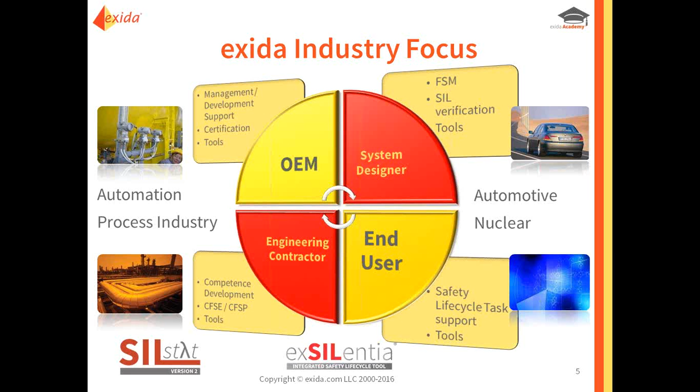exida is involved with the complete supply chain of functional safety in multiple industry sectors, anywhere from the original equipment manufacturers who require product certification through to the end users that use the products. exida provides software tools, training, consulting, and procedures related to functional safety, security, and reliability, as you can see in front of you.

Here are some of the engineering tools. The best part I like about our tools is that it removes that error factor - it removes the need to worry about manual calculations, unless you're old school, but we do have software that will help do the calculations for us. Anything that we know how to do, we like to try and make public so that we don't have to keep any secrets. It's all out there, all available to you as well. We just do it every single day.

We have alarm management tools. We have PHAx, SIL selection tools, SRS, SIL verification, as you can see in front of you. Basically our main tool there is exSILentia. We also have SIL Stat - a lot of tools that end users love to use.

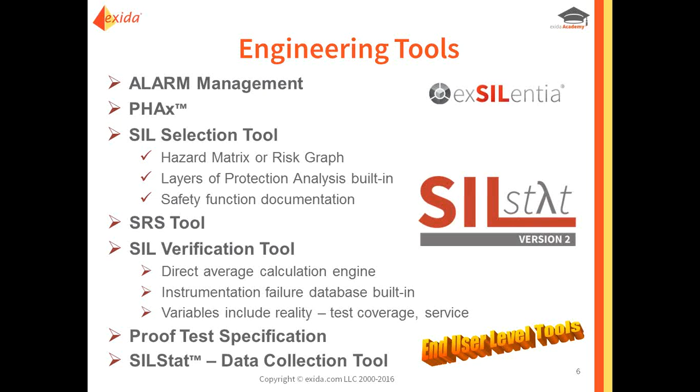We do have a suite of services and products. You'll see here the consulting that we can do is with the end users. It's in IEC 61511. We have, as you see here, 62061, ISO 26262, alarm management, and cybersecurity.

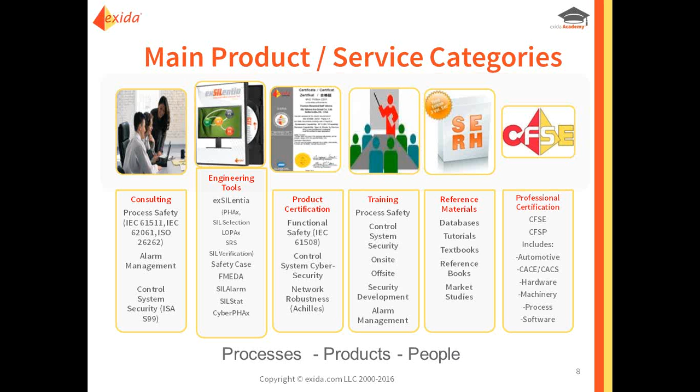Reference materials, we touched on that. And then, of course, we have the professional certifications for people as far as CFSE, CFSP, and then also now in cybersecurity, which is CACE and CACS. We do have some exciting news that's going to happen within the CFSE program as a whole. However, we'll have to wait, I believe, another month or two before we can release it. But we may have some new specialties for people in some other areas of functional safety.

All right, today we're going to be speaking about a few different topics. As you can see, closer to the end is when I talk about the proposal and your expectations, but I kind of want to share with you the process and how we get from A to B, from, hey, I'd like product certification, to, okay, here's my proposal. Now, how did you come up with this number? And kind of teach you a little bit about IEC 61508 and the amount of time that I have.

Okay, so first, let's start off with the introduction to 61508. Just a real quick top level.

Now, the functional safety goal, when you want to get product certification, there's a goal in mind with functional safety, and that goal is that the automatic safety function will perform the intended function correctly, or the system will fail in a predictable manner. And when I say predictable manner, it has to be a safe manner, right? You don't want to fail in a predictable, dangerous manner, because then people are going to get hurt.

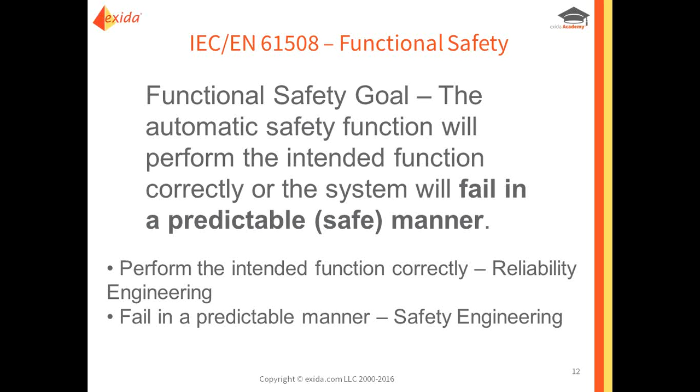So when something fails, and everything does fail, how is it going to fail? In a safe way, an unsafe way? Are you going to be able to figure out that something did fail, or is it going to be an undetected failure? Now, the two keywords here for reliability engineering is you want to perform the intended function correctly, and then when it fails in a predictable manner, that's when you get to safety engineering.

So IEC 61508, it's a standard, it's an umbrella standard. IEC 61508 is a huge document that we all have to go through. Well, everyone here at Exida, we have to learn to love this standard. But however, the standard does get broken up into other standards to help meet different sectors. For example, the nuclear sector has their own standard, as you see, the international standard. Machinery safety has one, and of course, our end users have their own as well.

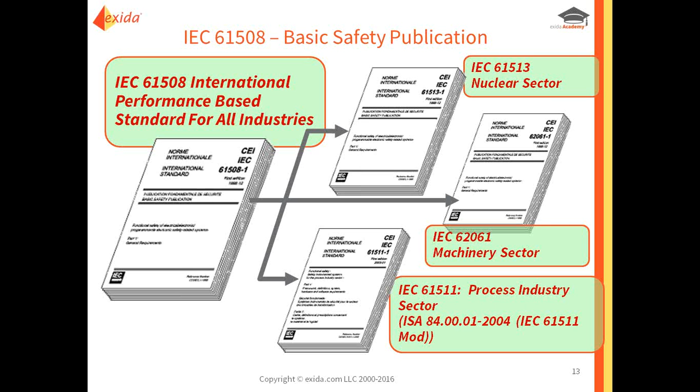So, what is certification? I see that there are some new people on here, and a lot of people will email us. I'd say 5-10 customers a week will come to us saying, hey, I heard about this SIL thing. What is it? What do I expect? How much time does it take? And these are very good questions. I see a few questions already trickling in, which I'll probably get to at the end, but I'll try and squeeze them in as I go.

But really, what can you certify? Well, you can certify systems. You can certify products, components. You can even certify people. The certification is a third-party assessment. It's done against a set of requirements based primarily on international standards like IEC 61508.

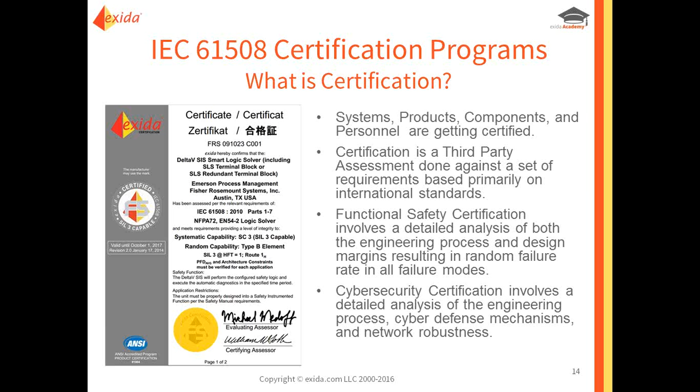Now, functional safety certification involves two different things. It involves both your engineering process and then also the design margins that result in those random failure rates in all failure modes, not just one, but in all failure modes. And then, as a growing need and concern has developed, we've also been accredited to now do cybersecurity certification because we're finding that systems are being impacted, and there's a huge need and a huge risk that's starting to develop within cybersecurity.

So, who does certification? Now I know what gets certified, but who actually does the certification? Well, certification programs have been established by private companies, also by governmental bodies all over the world, and all organizations who perform certifications, because you can choose from a handful of certifying bodies.

But make sure that these are accredited. For us here at Exida in the United States, the body to go through is ANSI, the American National Standards Institute. Throughout the world there are other institutes you can get your accreditation from. For example, one is DAkkS. Every country has their own agency to go through, okay?

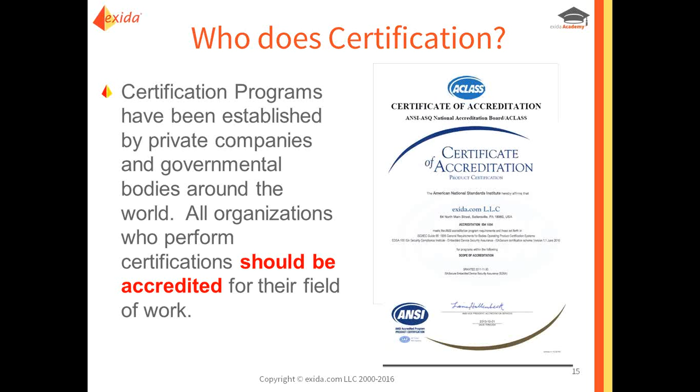So when you think about it, when you're asking someone to get a product certified, wouldn't you like to know that the person certifying you also has to be audited, to make sure that what they're telling you is actually the truth and that it actually does meet the requirements? That's why we stress the importance of accreditation, because we want you to know that we're accredited. We're going through the same rigor you are, just at a different level.

So how does ANSI fit in with this global feel? Exida is fully accredited by ANSI, okay? That's the United States liaison. So we're certified as a certifying body for cybersecurity and functional safety.

Now here's the next thing. If you're going to accredit us, ANSI, who's accrediting you? Who's giving you the audits? And that's where the IAF comes in. A lot of acronyms, but I'll explain them all. The International Accreditation Forum, okay?

So ANSI has to report to the International Accreditation Forum, and most countries around the world are signatories of the IAF for the multilateral recognition arrangement. This didn't happen overnight. However, what it allowed us to do is, because we're accredited by ANSI, the manufacturer now has a certificate that has global acceptance. So when you say this is certified per ANSI requirements, that now gets related, so any country in the world has global acceptance due to the stages that the program has gone through.

Now, when you have an accreditation and you're going to get your product certified, make sure whoever you choose, you see that logo on that certificate. If it's not on that certificate, more than likely they're not accredited.

So I always say to each their own, because there are other certifying bodies out there that say, hey, I don't need to be accredited. Why do I need it? My business is already doing fine. In fact, we do have a very large competitor of ours who's been around for a long, long time, probably the longest, and they're not accredited.

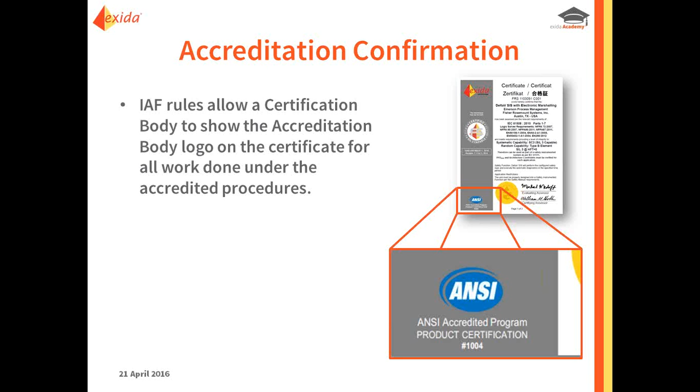All right, so you learned a little bit about 61508. Let's move into the initial certification request. So what happens? Well, if you're a new customer and you're saying, hey, I heard about this SIL thing, or hey, I have this product, I'm trying to win a bid, how do I achieve certification? Well, the first thing you do, obviously, is you send an inquiry in. It filters through the people till it gets to the right person who can help you with the service. So it comes into Exida, we'll say, and the first thing that's going to happen is you're going to fill out an application.

Why do we do this? Well, you're going to learn throughout the presentation why we ask these questions, because there are a few things we're trying to get to that can impact that proposal and impact how much time this job's going to take, so we can give you a timeline.

So this stuff all gets filled out, and then as soon as that's done, a quotation number gets generated within exida, and then we create the proposal. We're pretty quick at what we do because we do it every day, a few times a day with these proposals.

But the customer doesn't see the work behind the scenes, and they don't understand how did you get to that number. Well, we also have an initial welcome call, we'll go over the proposal and answer all your questions. But they're saying, well, what just took place? How did you say my job is worth X, when I asked for a different job and it was Y? How are these things different?

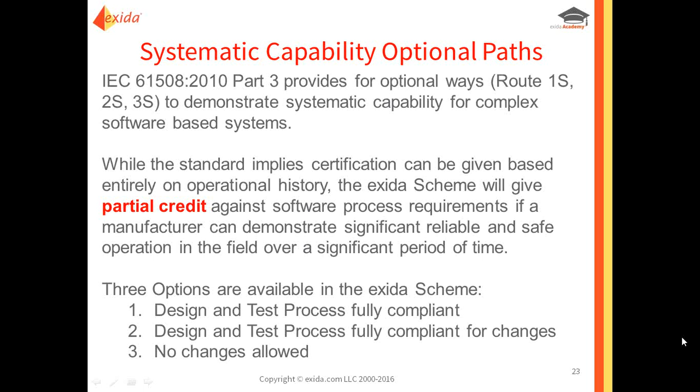So what did the exida scheme do? Well, we developed a scheme where we've developed 3 different ways to get certified. One, you can have a design and test process fully compliant. You can have another that's fully compliant for changes, and of course the third one is there's no changes allowed. Each path has different requirements going through. Also, for a proposal's sake, since we're talking about certificate expectations, the proposal amounts change depending on what path you go because of the amount of work involved.

Okay, so let's go with option 1. The first option is a new product. There's no field history. It's brand new out the box. You guys just developed it. It might actually still be in the development phase.

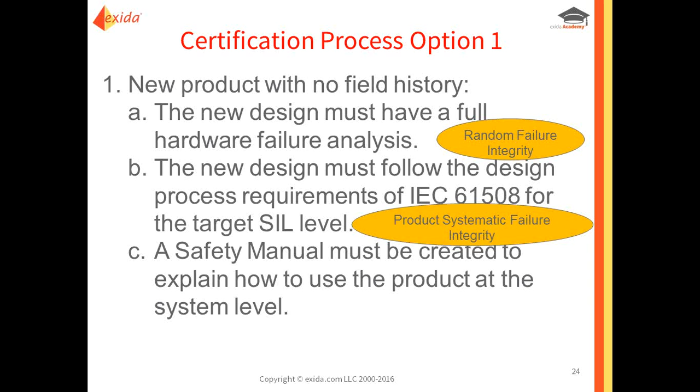So what do you have to go through? You have 3 different things. The new design must have a full hardware analysis, failure analysis - that's also called your random failure integrity. The new design must follow the design process requirements of IEC 61508 for the target SIL level - that's your product systematic failure integrity. And of course, a safety manual must be created to explain how to use the product at the system level. That's also another systematic failure integrity.

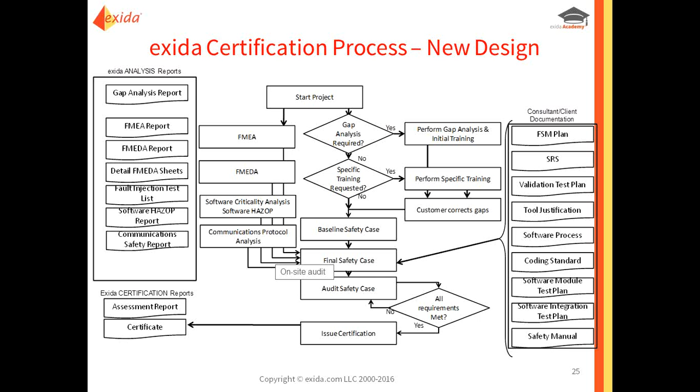So when you're looking at the new design certification process, this is still option 1. That diagram we went through in more detail - we have to go through the entire thing. There's no shortcuts, no requirements already met. Why? Because it's a new product and there's nothing we can use previously to help us achieve certification. So a new product is going to be a little more work, but that's okay, because sometimes time to market is the most important thing, whereas you don't want to wait 5 to 10 years to get field history or shipping records so you can get certification quicker, right? So sometimes you don't need to do that.

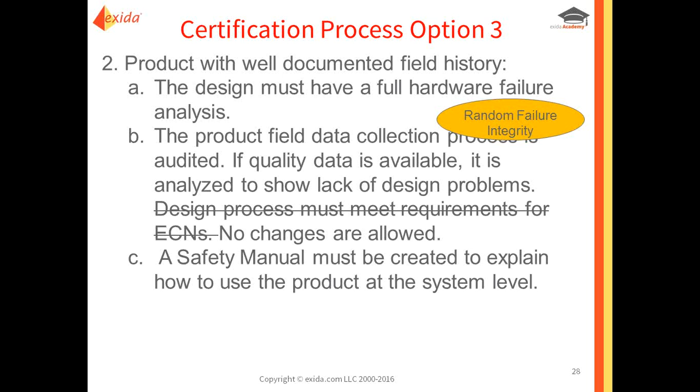Let's say it's a product you don't sell very much of, but you need it for a huge order. You can go through certification a lot quicker if you're expecting no changes. This is usually a strategic move. If people need certification quick and less expensive, they'll go this route, but they can't make changes, and there's a lot less work that we have to do to certify.

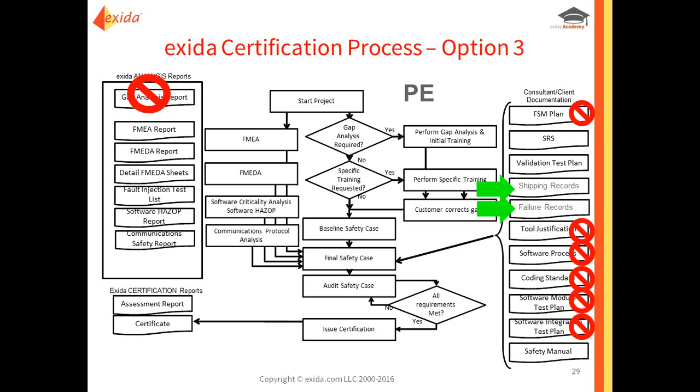And as you see here, look at all the red marks now of all the documents that we don't really need. Obviously, we still need the shipping records - that's key - and we need the failure record, which is also key. However, you can cancel out so many other areas.

Now we're quickly moving here into the certification process. So now that you've seen the different options, I want to share with you what other certifying bodies, or conventional certification processes, normally show. We get this question a lot, so I decided to spend a little time to put it together. But there are differences with every certifying body, so you've got to make sure you know what you're asking for.

Look here. There's your certifying body with a conventional process, and here's the manufacturer. I think I'm speaking to a lot of manufacturers today. So bear in mind, when you get a quotation and it's price X, and then you get a price from us and it's Y, you're like, well, why is it so much different in price? Well, here's one of the reasons usually.

Usually it's an a la carte type certification, which we can provide as well. We just don't recommend it, only because of how much time it really takes that manufacturer to get certified. They just don't realize it, especially if they're a newer customer.

The certifying body from a conventional certification process, you'll see here - you start your project and they do a gap analysis in a sense, and they say, okay manufacturer, will you please supply an FMEA, the safety case, which basically has all the different hundreds of requirements. You need to show them how you meet those requirements to the standard.

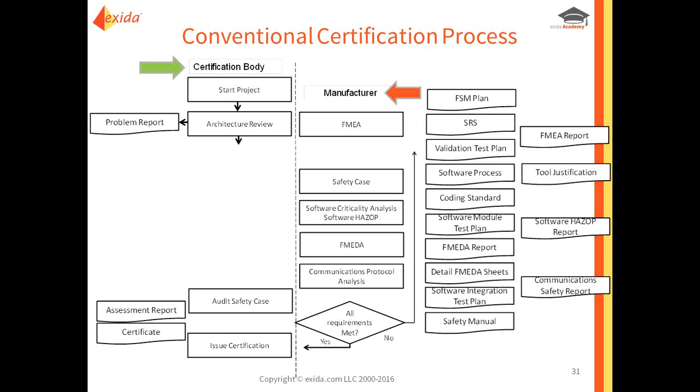So here's some quick quotes. I got two of them - I didn't want to bore you with too many. However, we feel these two we got this year were pretty right on point with the things we've talked about. This guy says: we estimated a functional safety project after getting a much better price from a conventional German CB. The work from our engineers was estimated to be between 1,000 and 2,000 man-hours. After discussing the process with exida, we estimated 200 maximum hours. The overall cost using exida was much less.

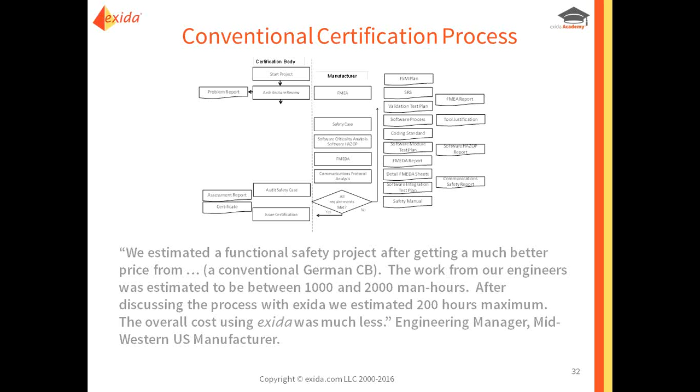And like I said, we get this a lot. Why? Well, when you look at the process and see how much work the manufacturer has to do compared to how much work we have the manufacturer do, it's almost night and day. And I'll show you what manufacturers have to do when we do certification as well.

Here's another one - I thought this was quite interesting. They said: we have been using exida, and our sister company was using, let's say, XYZ, a European conventional CB. I described our experience with exida and then asked the engineering manager in our sister company about their experience. He said it was much harder to get certification.

I interpreted that to mean that XYZ is tougher technically, but I had to ask why. He reported that XYZ did not respond to their emails. They put us back in the queue every single time one of their documents didn't pass. So when they had to go through that reiteration, they had to go through it again.

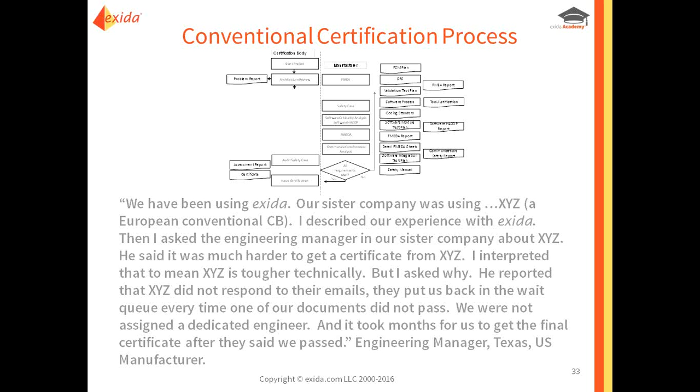However, they got put last, right? Because they didn't have that dedicated engineer to help them through the process. And it took months for them, even when they finished, to get the certificate once they had passed. We hear this story a lot. It was just nice to have somebody give us a quote so that we could put it down on paper.

So now I want to show you. Okay, so now you know the conventional certification. Here's what the exida process is, right? So if you see here, here's your manufacturer, here's exida. As you can see, we do everything for you. The only thing that we don't do is we can't make documents for you, right?

So we'll point you to what we need. We have the safety case. We'll give you the action items. You come back. You have a dedicated engineer for all of your work.

So with any job, there's usually 4 or 5 engineers dedicated to your job. You have a project manager who will be your main point of contact. You'll have an evaluating assessor, a certifying assessor, and also 1 or 2 others depending on if you have a Type A or Type B product. Type B products need 2 different people to do the FMEDAs, one electrical, one mechanical. So there's a lot of work that goes in there, and because we do it every day, we can get through it at a faster rate, okay?

And like I said, the only thing that we ask of manufacturers is just supply the documents. If there's testing that needs to be done, you most likely did the testing already. Some products that are Type B need fault injection testing, so we'll generate a list and say, will you test this? And you'll go through, you'll do it, and we'll keep moving on.

All right, so let's go and talk about the different stages here. Like I said, I'm going to break it into 3 phases so you can kind of understand the process a little bit more, and then we'll go and talk about the proposals and things of that nature. So the gap analysis, right?

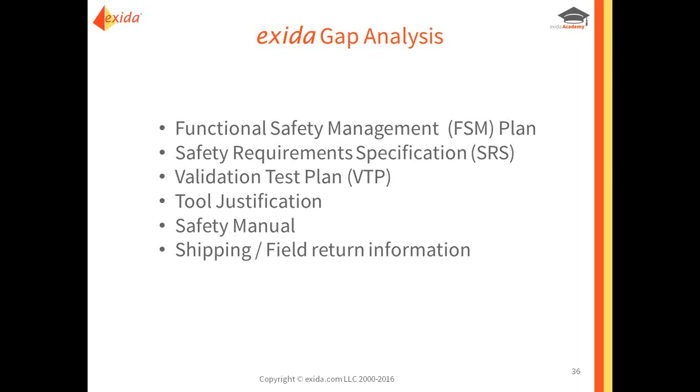We'll look at the validation test plans, some tool justifications, obviously the safety manual, and of course, if possible, the shipping and return information, depending on what path you go down. And from this, what we will do is create those action items, see where you stand per the standard, and then we can work off those action items as we go through the project.

What I like to do, and it can be done 2 different ways, is you can have an on-site audit at the beginning, or we can also have one at the end. I like doing it at the beginning personally. Why? Because I like seeing that the documents given are what's actually being done on the manufacturing floor.

If manufacturing is done on the floor, it's perfect. We're able to go there. We're able to just verify everything. We can interview certain people, just making sure that what they're saying is what they're doing. And it's not that we're trying to find fault. Let's just make sure that this company is as safe as they think they are, okay? And we don't shake fingers. We just really bring awareness to what's going on inside.

Once we do the manufacturing tour, if they require, we do it without any charges. We also do a training while we're there, and the training is excellent. You can bring as many people as you want in this room. They can all sit in, they can listen. We'll do a quick overview of IEC 61508.

Why we think this is important is because now you'll have an understanding as to why we're getting certification, why you are requesting this product certification. A lot of marketing people love this training because then they can understand it, they can go and sell it, and they can answer the questions.

We'll also, at this time, go through that gap analysis if there's anything outstanding. It's incredible how much work you can get done when you're person to person. I guess it's kind of old-fashioned of me, but I believe the internet's great, however it has its limitations. I know that if someone walks in that door, even if you're reading an email, that person who walked in has priority, whether it's just a story or a water cooler discussion. That's just human nature.

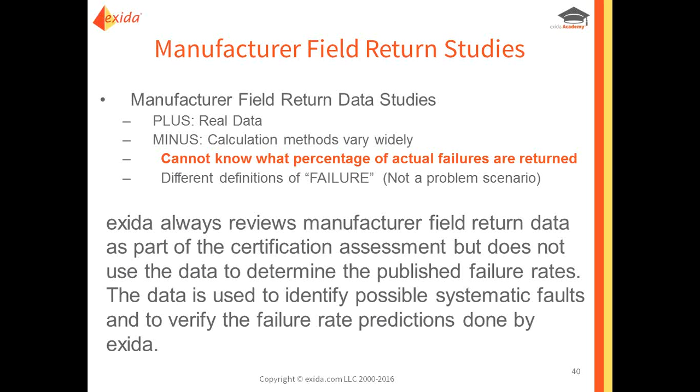We actually enjoy looking at companies' failures. Why? Because it's fun to see if we can see any common failures, or if there's any outliers. Some outliers you can throw out because maybe it wasn't the manufacturer's fault. Some reoccurring ones we want to look at and say, okay, look, you're seeing this failure a lot. What are you doing about it? Show us an impact analysis. How are you going about correcting it so this does not happen again? And it only makes that company safer.

Now we have predicting failure rates. You had actual failure rates with pros and cons, right? The biggest con is that you don't really know all the failures. Now, when you predict failure rates, exida, we developed what we've talked about, the FMEDA. It's a technique that predicts failure rates and failure modes on a product. This is one of the most used methods, and it's widely accepted.

Now, how did we get to this stage? We didn't do this overnight either. exida has the world's best set of field failure data, with over 250 billion unit operating hours from the process industries, with which it has created a calibrated component failure database to use in the FMEDA analysis.

So what do we do? We actually take that field failure data that we're seeing from end users, and then take the FMEDAs that we've created, the predicted failure rates, and match them. We say, okay, how well are we doing with this ball valve? How well are we doing with this actuator? And we can actually see what the actual failure rates are compared to what we predict. We are very, very close, and it's very exciting that this tool has become what it is today.

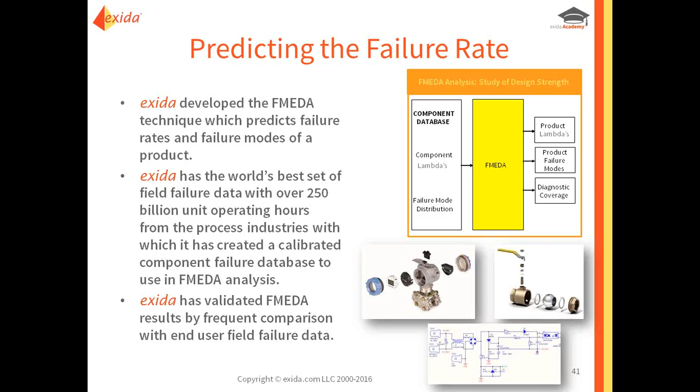So I've talked about this word FMEDA a lot. What exactly is an FMEDA? Well, a great way to explain it is that every failure mode of every component is examined.

And I want to pause there because that's exactly what we do. It's very cumbersome, it's very tedious. It takes a lot of time to do an FMEDA. But that's what we get, that's why people pay us, is because we don't mind doing it. We're those people that don't mind sitting here and crunching numbers for hours at a time.

So we'll take that product, right? And we don't need your product physically. We just need, let's say, a bill of material, a schematic, maybe the wiring diagram, and we'll look at this product, break it all the way down to its nut and bolt, and figure out how many ways this washer can fail, what could happen if this happens. So we'll have all these scenarios. Because we've done it for so long, we have them all listed, and we go through each list, each component, and then we come up with this.

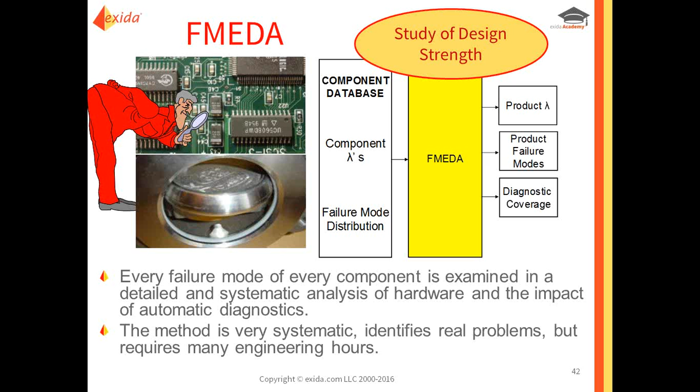Then at the very end, after you put it all together, that's how you get all your different failure rates, and you add them all up. You can see what's your fail-safe, fail dangerous, dangerous detected, dangerous undetected. This method is very systematic. It identifies all your real problems, but requires, like I said, many engineering hours.

Okay, so now you understand the FMEDA at a top-level approach. Now you have this failure rate data. There's differences from what exida does compared to other conventional certification bodies. exida, and I can't give us all the credit, but because of our advisory board that consists of all end users, they tell us what they want to see. They tell us what they need to see when they buy a SIL certified product.

They don't want to just see that PFD number, which has no false trip data in it, as you see in the bottom right-hand corner. You can see that quote there. It says, false trip rate is an essential design parameter for our SIS designs. How can I do this without the data? Right? Only exida certifications provide that. That's one of the bonuses, that we do things with the end user in mind.

You'll see in the left table there, either table you want to look at, we identify different services: safe, the Lambda SD, the Lambda SU, the Lambda DD, the Lambda DU. What is that? Safe detected, safe undetected, dangerous detected, and dangerous undetected. Now you can see how this product will fail, and those are in fits.

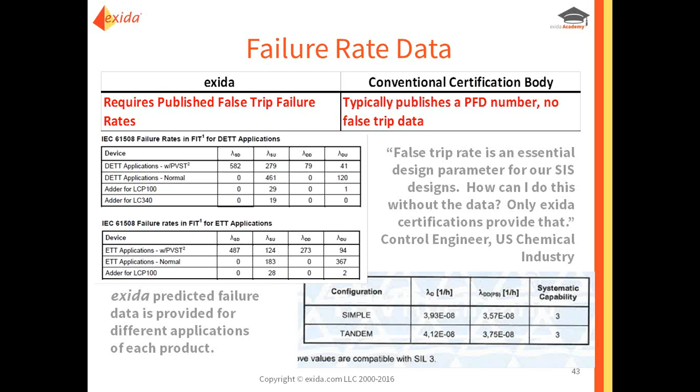And you'll see here different applications of each product. So we don't just say one product, we actually split out the application so you can see it in different ways on how this product can fail.

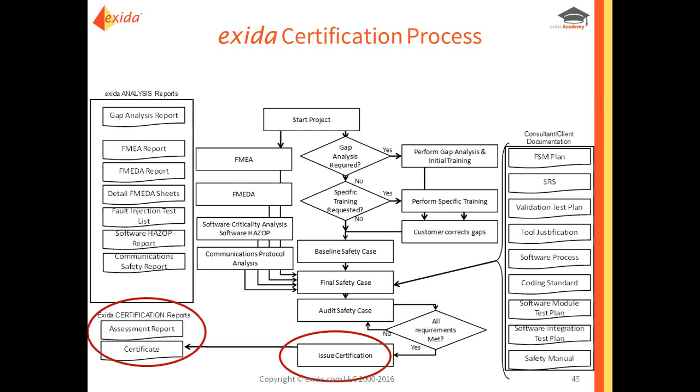So now that we've talked about the certification process, how the FMEDA report is generated, the baseline safety case, the final safety case, all of this is now done. Now we're getting to the certification, finally the end.

Now, these things are published. The assessment report is your top level report. It'll go through and discuss how you achieve SIL certification and your capability rating.

But the assessment report is something we can put out there to help explain that certificate.

Now, here's another great thing: once we do the certification, it doesn't stop there. We actually continue working for our customers and clients. We developed this safety automation equipment list, originally solely for exida. We wanted to make sure we knew what products we certified when we were small, and when they were up for the next audit, because every 3 years you have to get your product recertified, which is a much simpler phase than actually certifying it.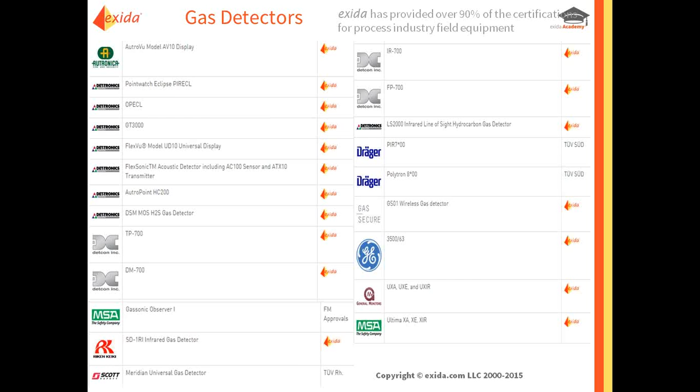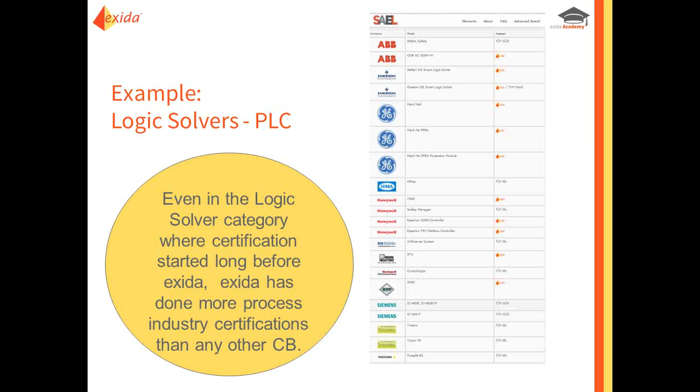We also have logic solvers. It's nice to see how many we've already done since we got into this a little late. exida has only been around for 17 years, whereas our competitors have been around for closer to 100 years. And we're making traction.

We're doing very good. In fact, just last year we did a third-party survey because we wanted to find out - one of our founders, Dr. William Goble, was very curious to see how well the company was doing. So he asked a third party to go out and look at how well everyone is doing in the industry, and these were the results. It was great to see that we are #1 in market share and mind share.

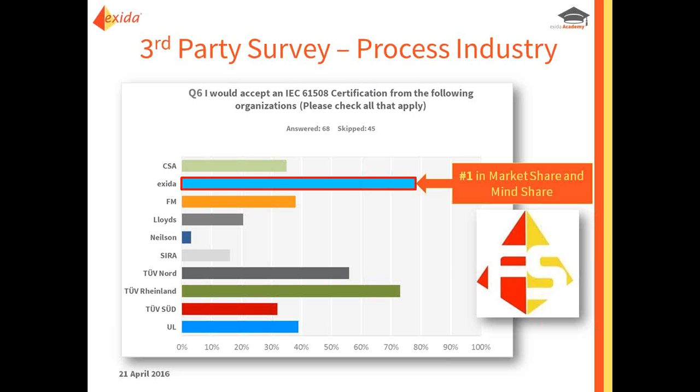And also in 2016, we're actually going to be doing even better. So that's very exciting that the company's continuing to grow, and we've only been around for 17 short years.

This one is a little surprising to me. I didn't realize, as you see in the previous slide, the major competitors are the different divisions of TUV. Those are some of our bigger competitors. And if you add all of them together, all three of them, even still, we in the safety device certifications are number one. We actually had done more certifications than all three combined, which is kind of neat to see. It was definitely nothing that we thought we were going to see.

And then even in the logic solver division, which, like I said, we got into late, we still have 44% of the total revenues. And what's nice about that is if you split them up, each TUV individually, we're the most out of any single TUV organization. I only mentioned TUV because they're the next ones in line. They're doing fairly well too.

Experience, I don't think we need to say much, only that we've been helping a lot of people lately.

And now into the proposal, okay? I've got 5 or 6 questions here that I need to get to, so let me go through this proposal part. But okay, so now look, we saw this slide already.

We were like, hey, what does it take to achieve this proposal, right? So what are my expectations? Well, now you kind of see what happens in the background - all the different processes that we'll have to go through, all the extra work that we put on ourselves, which is fine. It's what we do. We do it every day, so it's okay.

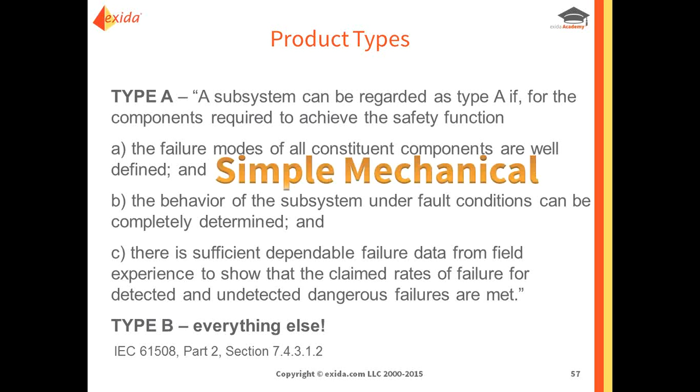One thing we didn't touch on, and this is something you don't need to know - this is something we will let you know if you don't figure it out yourself: are you a Type A product or are you a Type B product? A Type A product, I like to say, is those simple mechanical products, okay? They're solenoids, they're pressure switches, basically simple devices that meet IEC 61508. We call these Type A devices.

Now, what are Type B? It's everything else, okay? It's elements with a microprocessor or a complex ASIC. These are always Type B. I just call these smart devices - things that have memory and boards and software. Okay, so those are the different types.

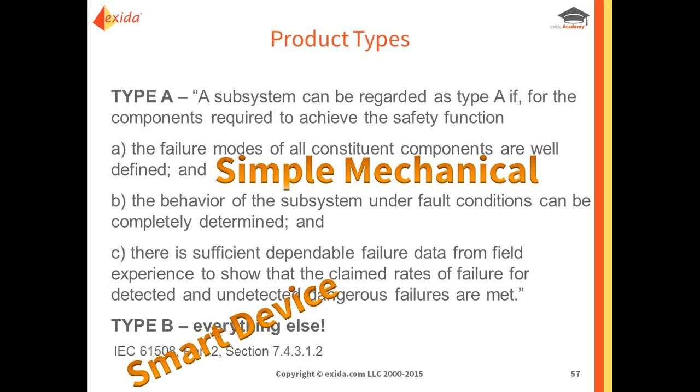Now, you can have electrical in a Type A - that's completely okay. But when we see your application, when we see this diagram, we can let you know which one you are. And why do I say that? Because when we actually look at the different types of products, the cost is significantly different. Yeah, there's a range there for a Type A product - you're going to look between $15,000 and $45,000. Not a whole lot of money.

Not knowing what process goes in place, what I like to do is calculate how many hours you think it's going to take, and then multiply that by whatever your work hour rate is. If it's $180 an hour, if it's $200-something an hour, whatever your engineering time is, see, well, is it worth it for us to go through this process ourselves to a certain extent?

Now, Type B is I call it a different beast. It's a different animal. It can be so complex, or it doesn't have to be that complex at all. The difference in range is basically there's a larger range dependent upon the complexity of that product.

We need to know what path are we going. Is it a new product? Is it a product that we can do proven in use? Is it something that you don't want changes for? These all impact this type of proposal.

And another thing, and I got a question here, it's perfect timing. People say, well, look, I've gotten certification in the past with you, how much does it cost if I go through it again? Well, it's going to be less. And if you want to know how much less, if you go through the process with us one time, you get through it, you pass, pat on the back, excellent job. You say, hey, you know what, that wasn't so bad, I have another product. What do I have to look at?

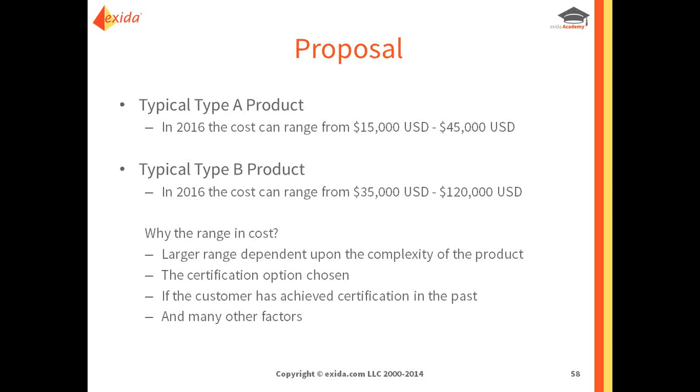Another thing is we already know your site. We've been to your site. As long as we've been to your site within the last year or two, we can even skip the surveillance audit - excuse me, the on-site audit. And that's also right there a huge savings. So there's a lot of things that we can do once we get through the initial process that I like to encourage people to consider. That was a very good question. Thanks for asking that.

And this does kind of conclude everything I wanted to talk about today. So I hope you have a better understanding of what was involved, how do we get from A to B, what do I expect when I hear this SIL thing, what's included in here, and of course we can have this recorded so that you can watch it over and over again to make sure you understand everything.